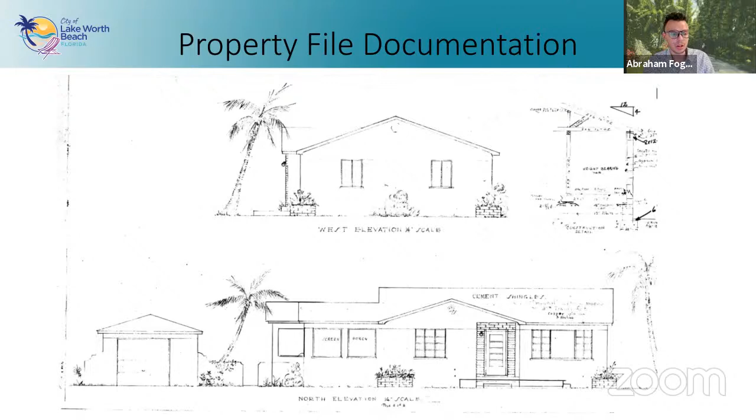So just a quick recap in these next couple of slides. The subject property is a 50 by 135 lot located on the southeast corner of North Palm Way and 8th Avenue North, a single family property in the single-family residential zone district. As we covered in July, this is a masonry minimal traditional structure that was designed in 1949, and on the bottom left corner, we can see the garage, which is what we will be discussing tonight.

Here's a current photo showing the garage and the alley behind. So again, tonight we will be reviewing the conversion of the existing garage into additional habitable living space to be a pool cabana, and a variance from base flood elevation requirements of the Florida Building Code due to substantial improvements.

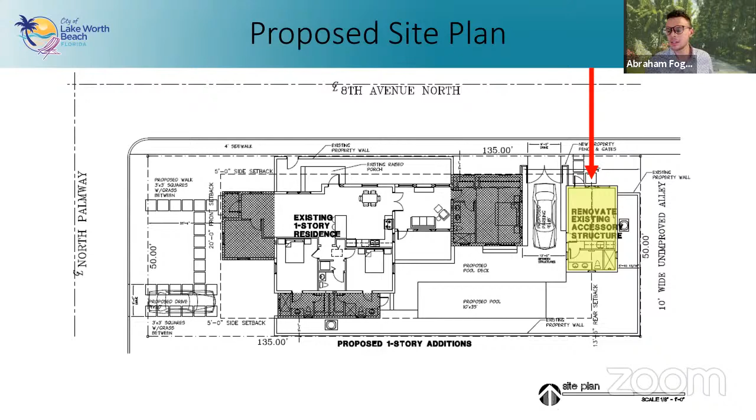So here we have the site plan that was approved in July. I've highlighted the location of the existing garage that will be converted to a pool cabana. There are no changes to the actual footprint. They are exterior alterations and a change in height.

So as I mentioned, we're not seeing any site changes here. The main thing is the BFE, which we covered last meeting, but just to touch on that again, per FEMA, a substantial improvement may occur when plan improvements exceed 50% of the appraised pre-improvement value of the structure based on Palm Beach County property appraiser records. That value is $124,106. So at that 50% threshold, that would cap the improvements at about $62,000.

And here on this slide, we have the project valuation provided by the architect, which would place the overall improvement at over $135,000. So that would constitute a substantial improvement. When that occurs, you would need to meet current base flood elevation requirements.

The pending flood zone is AE, which would require 9 feet NAVD. The current garage sits at 4 feet, and there's a proposed improvement to the garage slab that would raise that by 4 inches, so that would bring it to 4.33 NAVD, whereas the pending flood zone puts it at 9 NAVD.

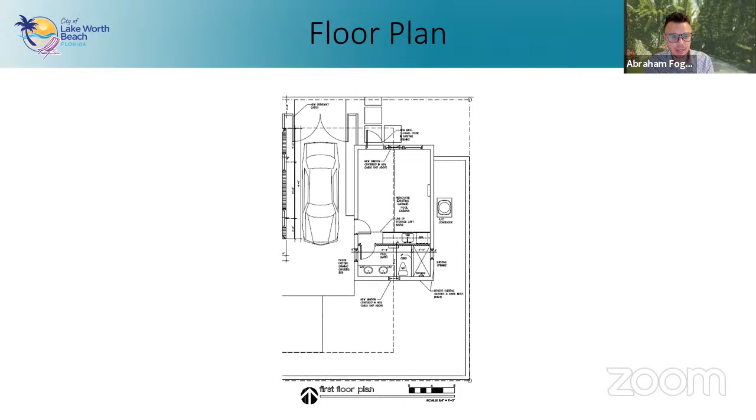The applicant has provided 2 options. Option A, and the project architect can further explain, is the preferred option where the hip roof would be changed to a gable roof, and overall it has been lowered to match the ridge height of the other gables on the structure. The other change was a window beneath that gable end that now is a decorative vent. Overall, the rest is largely the same since July.

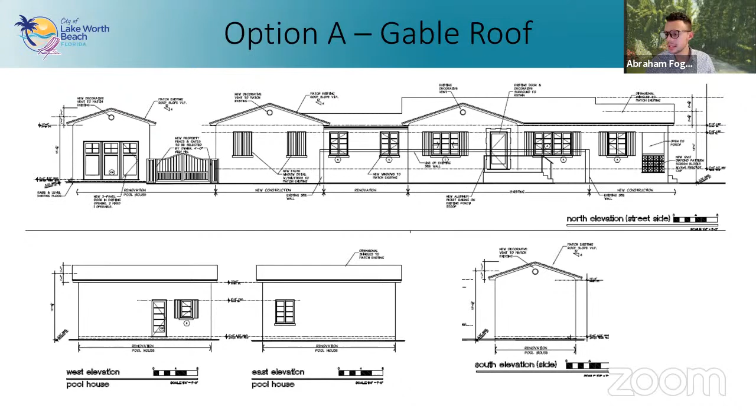So option B is largely the same, but we do have a hip roof design, and this is being presented since the original garage was designed with a hip roof, so this option would respect that original design.

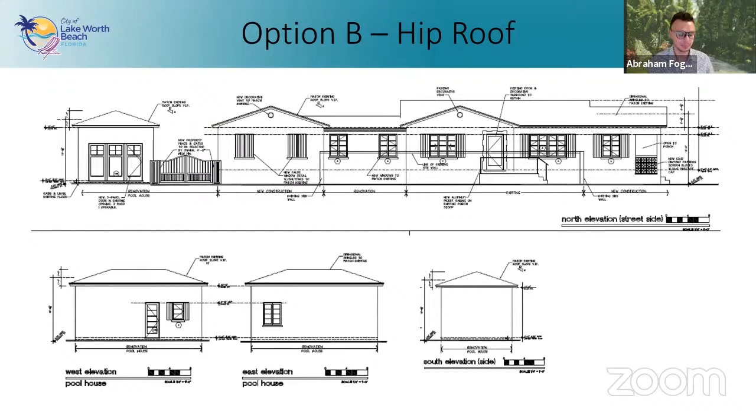So as we covered last month, the pending flood zone requires 9 feet. After those 4 inches are added to the existing slab, it would be 4.33. So you would be providing a relief of 4.67 feet.

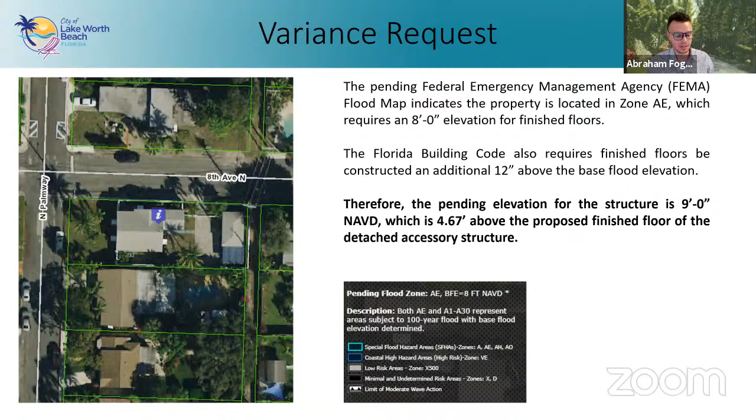Per our code, that relief is available for properties designated in a local historic district as contributing properties. This property is eligible for this type of request since it is a contributing resource to the Northeast Lucerne Local Historic District.

Moving on to our variance criteria, it's provided in LDR section 23.7-7G2. We did go over this criteria in July.

In our staff analysis, we contend that complying with the strict interpretation of the Florida Building Code could result in a disruption to the structure's historic appearance. Raising the finished floor elevation of the converted garage an additional 4.67 feet could disrupt the foundation and wall proportions and general height of the building when compared to similar structures.

Allowing the garage to remain below the required BFE is unlikely to increase flood heights, cause additional threats to public safety, public expense, or create a nuisance.

The proposal is compliant with impermeable surface requirements in the LDRs, referring to the site plan as a whole, and there are pervious buffers around the property lines which also help with drainage.

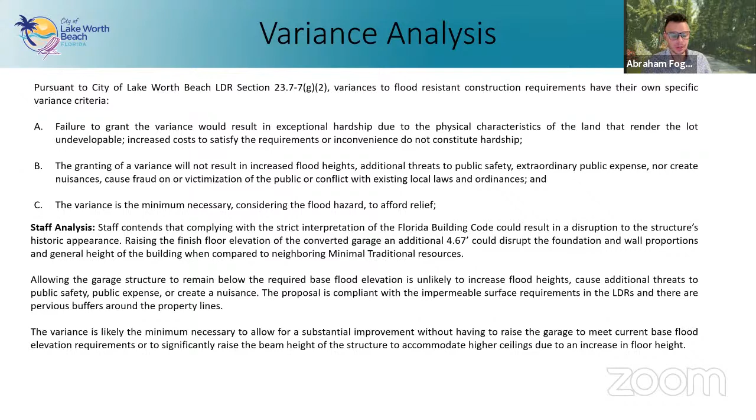That is the preferred design of the applicant, but an alternative design illustrating a hip roof configuration is also provided for the board's consideration. Both roof design options maintain the same overall height.

The proposed alterations, while significant, are not in conflict with the architectural style, massing, and design common among minimal traditional buildings from the 1940s and 50s.

The applicants have lowered the roof's midpoint height from 14 feet 3 inches to 12 feet 2 inches since the July meeting. As previously mentioned, the window beneath the gable end was replaced with a decorative vent.

Staff has not received any written comments associated with this application. In conclusion, the proposed exterior alterations requested in the COA application are generally compatible with the Historic Preservation Ordinance criteria and the Historic Preservation Design Guidelines.

The structure also meets the eligibility requirements for a variance from BFE requirements, and it is staff's analysis that proposed improvements would not preclude the continuation of the building's contributing designation. Therefore, staff recommends approval of the COA and variance applications with conditions.

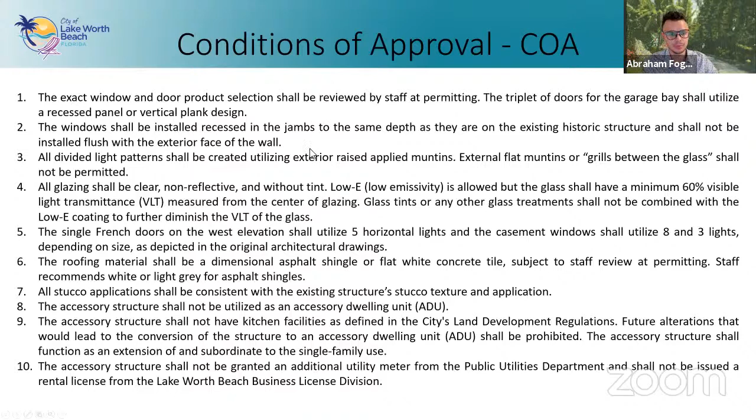I think let's ask the applicant if he has anything to add to Mr. Fogel's presentation.

You're muted, sir. Can the applicant hear us? Yes, he can, I can hear you. I'm sorry, I was muted.

Do you have anything to add to Mr. Fogel's presentation? I don't have anything to add other than to reiterate the request for the gable design. As we turn the corner from the front of the house down the side street, I think the repetition of the gables offers a better massing and really ties all of the additions and work we're doing on the property together.

Okay, thank you very much. There seems to be no public comment on it. So does the board have any questions?

Let's start with Mr. Pickett, any questions or comments? I just wanted to clarify, it does say in the conditions that there aren't supposed to be any kitchen facilities in there that would allow it to be an ADU, and it looks like that on the floor plan. I just want to make sure that's the case.

Overall, I think they did a good job coming back with some good alternatives. I do still prefer the hip roof, but I'm open to the gable roof.

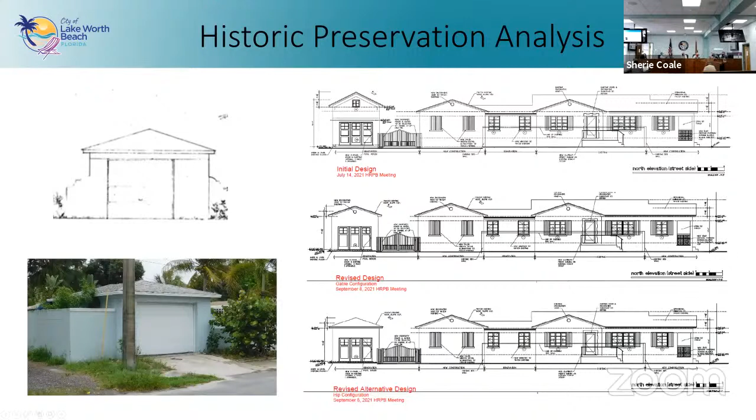Well, it seems like the applicant has done everything we've asked for. Could I entertain a motion, please? Yeah, I move to approve HRPB project number 21-00100119.

And 21-01500004, with staff recommended conditions, for certificate of appropriateness for exterior alterations and a variance from base flood elevation requirements of the Florida Building Code for the garage structure located at 732 North Palm Way, based upon the competent and substantial evidence in the staff report and pursuant to the City of Lake Worth Beach land development regulations and historic preservation requirements.

Motion by Mr. Harris, second by Mr. Dorinzo. Any more discussion? Hearing none, all in favor, aye. Opposed, nay. Motion carries unanimously. Thank you, sir. Thank you very much.

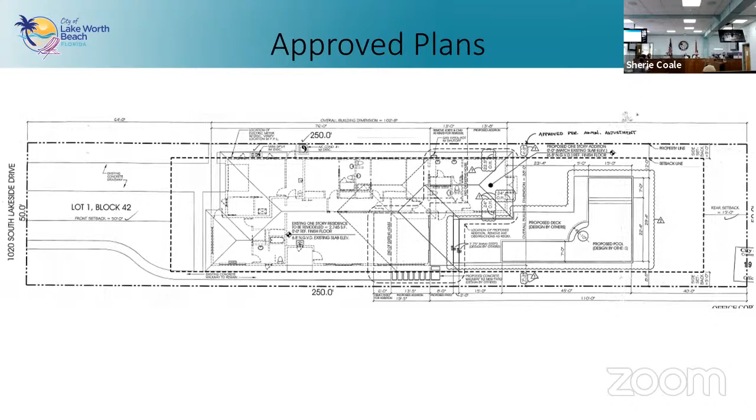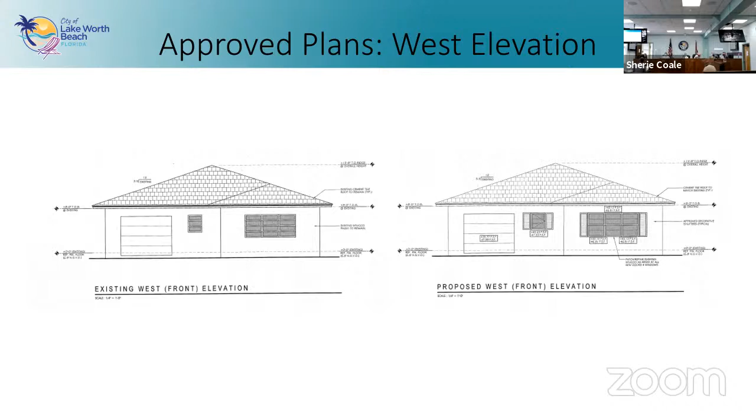According to the Lake Worth Beach Building Division records, the rehabilitation of the property was completed under building permit 192165 with a declared valuation of $251,955. The applicant submitted the completed work application for the work certification under the tax exemption and documentation for the completed work, and we'll go through some of those photos now.

This is the west elevation. As you can see, the new flush panel door, the very bright white concrete tile roof, and the new windows.

Here you can see a close-up of the front bay of single hung windows. These were approved with a divided light pattern to kind of replicate the awnings that were removed, the 4-light pattern.

This is the south elevation fronting South Palm Park. Again, you can see a little bit of the white tile roof, the new windows, the new entry door, and exterior lighting fixtures.

This is a wider shot of that elevation, and you can see a little bit of the addition to the right side of the photo. It's got that large glazed area and then a covered patio area.

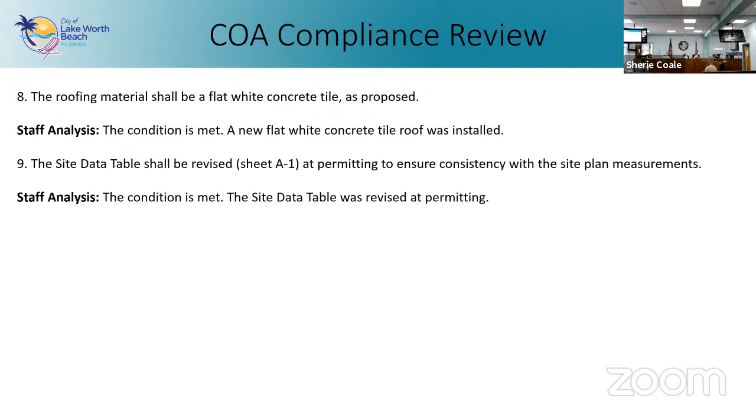These are the tax exemption conditions of approval. The project was found to be in conflict with condition number 1, which requires compliance with all conditions of approval, and as we just went through, conditions 1 through 3 were not met. Condition number 2 also requires compliance with the Secretary of Interior standards, so we'll defer to the board to determine if the intent of the SOI standards were met in this application. But the application is in compliance with number 3, which was their documentation requirement.

The project was approved and conditioned prior to the adoption of our current glazing standard, which requires a visible light transmittance of 60% or greater. The standard effectively prohibits low E treatments, which turn glazing shades of gray or green.

The current glazing standard was researched and instituted due to inconsistent industry standards between manufacturers as to what constitutes a clear low E glazing. But per the applicant's Part 3 application, included as attachment D, low E windows were selected to protect the interior materials of the home from harsh exterior southern, eastern, and western exposures. Bronze window frames and tinted glass were selected to provide the best match for the existing windows, which were tinted bronze glass with bronze frames.

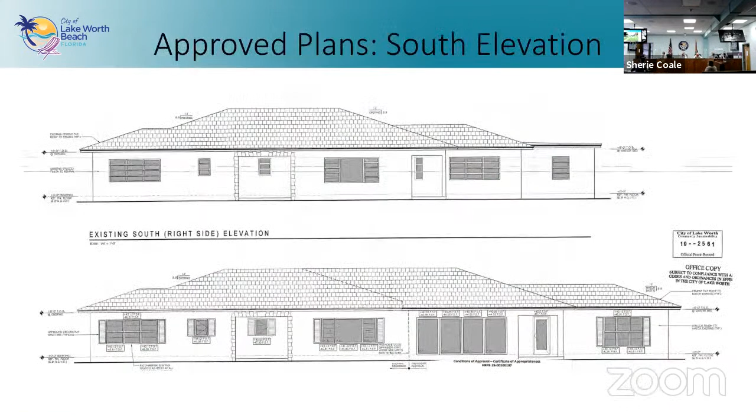I'm going to go next before a couple of others and say that I do have a problem with it. Ames Bennett in 1956 had no ability to put in tinted glass. Also, if you look at the before front elevation, the window next to the garage apparently does not have tint on it, which makes me think the tinting on all the rest of the glass was applied, probably with a film at some time in the past. But the original building, to which we are duty bound to look, does not have tinted glass.

And by approving this, we are giving this owner—and he did a wonderful job, I noticed it gets the House of the Month award, a beautiful job—but we are going to be giving him a 10-year free ride on what is it, $250,000 or so of improvements. That's a lot of money for the city, and for that kind of money, I think we should be a little more rigid in our standards.

I may be outvoted here, but I think maybe there's another way. You had mentioned there is a possibility of approving it except for that. And if so, what does that do to his tax deferral?

It would require a little bit of collaboration between us as staff and the county tax collector. When we hand off the application, it would essentially be removing the cost of the windows, or the cost of the improvement for the windows, from the scope of the tax exemption. They would still get the tax exemption for the addition, the roof, the interior improvements—basically everything aside from the increase in cost as a result of the windows.

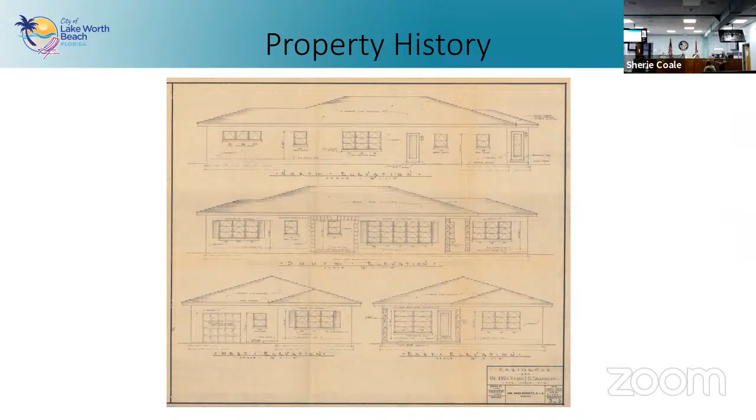I'll move to approve it. But 100%, we're not talking a proportional, we're talking now 100%, right? It's whatever would make up the motion.

It's been represented that the windows all were the same, and they've simply replaced. Okay. All right, we're going to read. Okay, so what do I read? Yeah, it's always - okay, I see it. I move to approve

HRPB project 19-001-00107 for a completed work application for a historic preservation ad valorem tax exemption for the property located at 1020 South Lakeside Drive, based upon the competent substantial evidence in the staff report and pursuant to the City of Lake Worth Beach land development regulations and historic preservation requirements. Further, I move to recommend to the Lake Worth Beach City Commission this application and its approval.

And just for clarification, Mr. Martin, I'm assuming you're making this motion because you're recommending that the replacement windows are consistent with the Secretary of Interior standards because they replicate for windows - is that correct? Yes, that's correct.

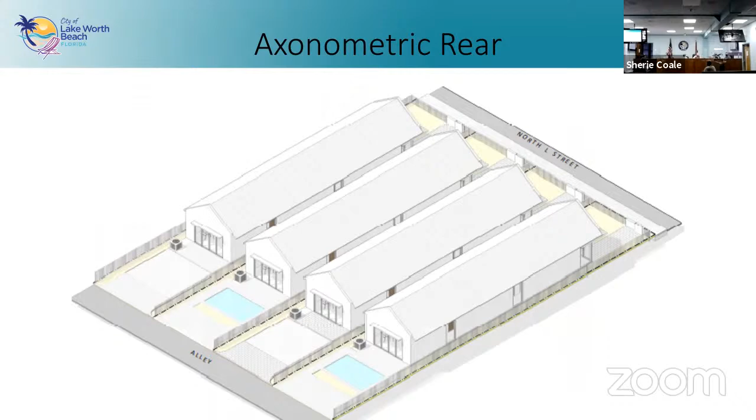Here's a rear view showing the fenestration on the south and rear sides, along with the rear site plan configurations. You can also see that the mechanical equipment is located to the rear of the properties, which is where code specifies that it should be.

A landscape plan was also provided in the application, which will go through final review at permitting. A cursory review by the city's horticulturalist indicated that the proposed plans were meeting the minimum requirements. A tree survey and disposition plan will be required at permitting. All trees that will be removed must be replaced on site or mitigated per code requirements.

Here you can see the interior plans. Again, these are going to be identical for all 4 buildings. It's kind of a shotgun layout with an office bedroom at the front, a flex bathroom, laundry off the hall, and then a master, and then a common great room, dining room, and kitchen. The living area to the rear does have large sliding glass doors to access the rear yard.

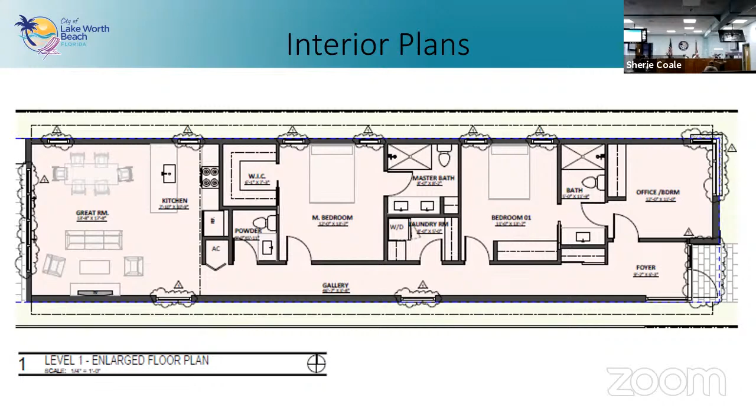The project architect has established a regularized fenestration pattern around the building. You can see those openings clouded. Included here are some corner glazing on both corner windows on both corners of the front facade, which is a signature element of Art Deco and Streamline Moderne architecture, and we'll hit on that in just a moment.

These are the proposed west and east elevations. The buildings are pretty low, with the top of the gable at approximately 17 feet. The rear west facade features a 4-part slider, which does take up most of the facade. And then the front east elevation features those corner casement windows and fixed windows, an eyebrow over the recessed entryway, some stacked horizontal wood banding. You'll notice though that the fascia of the gable roofline is hidden behind the wall, but it does stick out on the sides where the overhangs are.

These are the proposed side elevations. Again, the design utilizes vertically oriented casement and fixed glass windows at regular intervals and generally avoids long expanses of blank facade. The south elevation uses some substantial floor-to-ceiling windows to allow light into the hallway, but it does use some blind recesses to create a regular pattern. You can see that indicated as the stucco reveals the faux windows.

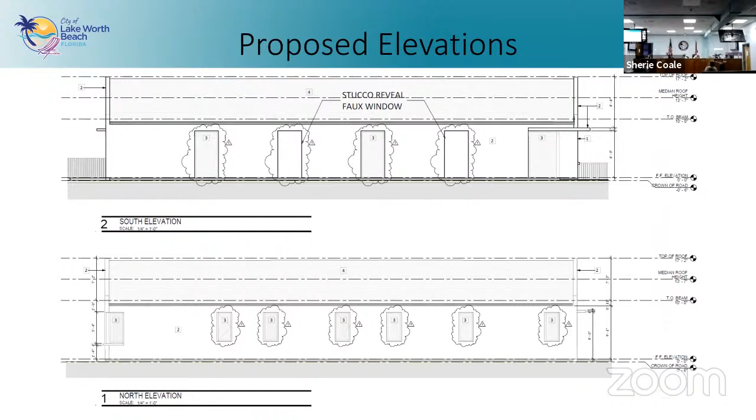This is the streetscape elevation at the top, which is a great tool to use to determine your overall height, massing, and spatial compatibility. The structures are generally consistent with other single-story buildings with gable roof lines on the street, height-wise. Below is a rendering provided by the architect. You can see the wood slat detailing around the doors and the configuration of the roof lines. Also pictured here are the fencing, gates, and landscaping. You can see that the horizontal wood slat detailing is carried over onto a sidewall next to the entry gate for each property. Also evident is all the finishes. So it's a smooth stucco exterior, white window frames, full view glazing, and again, that wood detailing and asphalt shingle roofs.

So the historic preservation analysis is provided in your staff reports on pages 6 to 11. Staff has 2 primary areas of concern highlighted in the analysis, which is the execution of the massing in regards to the architectural type of the building and the general repetition of 4 identical buildings.

The project is designed in a contemporary Streamline Moderne style, and this style has its own chapter in the design guidelines. But per the design guidelines, the style was generally 1 or 2 stories, utilized smooth stucco walls with rounded corners, horizontal detailing. Windows were generally porthole, casement, and fixed pane, but some windows wrapped the corners of the building. The buildings generally sit on raised masonry or slab foundations and utilized flat roofs almost exclusively.

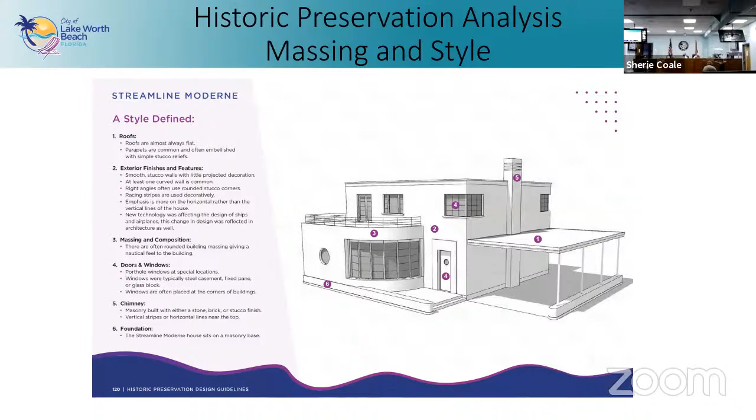So the current proposal features many of the design traits associated with Streamline Moderne architecture, including the corner fixed casement windows, the horizontal eyebrow, and the channel detailing around the entryway. Staff's primary concerns come from the gable roof line, which is atypical for the style, as flat roofs are most compatible. The building's prominent gable roof line is most commonly associated with the city's collection of 1920s frame vernacular cottages, which feature wood clapboard siding, vertically oriented windows, and slender rectilinear plans. The design guidelines discourage the mixing of architectural styles or architectural elements from different styles, and it states that the best approach is to choose one style of architecture and to design a structure that utilizes the common characteristics, proportions, and materials of that style.

So to keep the architectural style consistent and true to form, staff is recommending that the proposal utilize a flat roof with a short parapet. You can see the staff edited image to the right on your screens, illustrating what that could look like. This is shown with a slightly tapered parapet, similar to the building on North J Street that we just saw.

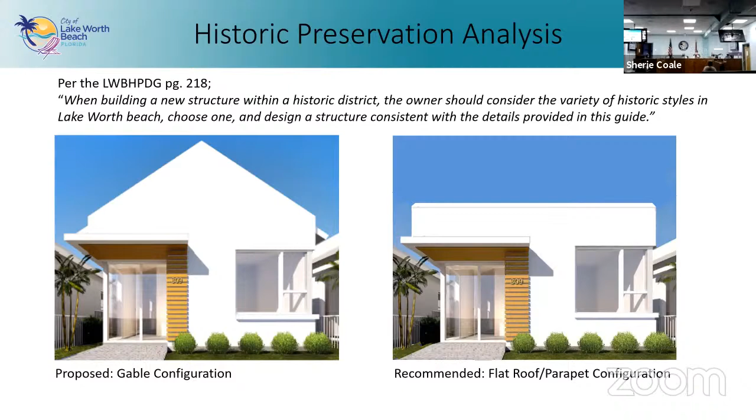Next slide. In addition, the city has site design qualitative standards, provided in section 23.2-31 of the LDRs. The intent of the standards is to minimize negative impacts of development on neighbors by establishing qualitative design requirements. Section D5 states that look-alike buildings shall not be allowed unless, in the opinion of the board, there is sufficient separation to preserve the aesthetic character of the present or evolving neighborhood.

This is not to be construed to prohibit the duplication of floor plans and exterior treatment in a planned development, etc. But this requirement involves the construction of 4 identical single-family residences that are not part of a planned development application. Staff has concerns that the repetition of 4 identical buildings will detract from the varied and diverse development patterns of the streetscape and surrounding historic district. While structures from similar architectural styles share similar design elements, it is rare that independent neighboring structures be identical. Development in Lake Worth's historic districts is eclectic and diverse, creating a wide-ranging architectural environment. Staff contends that the construction of 4 identical structures is not in keeping with the surrounding built environment.

Next slide. As such, staff is recommending denial of the application, as the roof design is inconsistent with the design guidelines criteria on Streamline Moderne architecture and new construction. Additionally, as just covered in the site design qualitative standards, the repetition of 4 identical buildings is inconsistent with the development patterns of the neighborhood. The item may be continued at the board's discretion to facilitate a redesign of 4 unique residences that are consistent with the development patterns of the surrounding district.

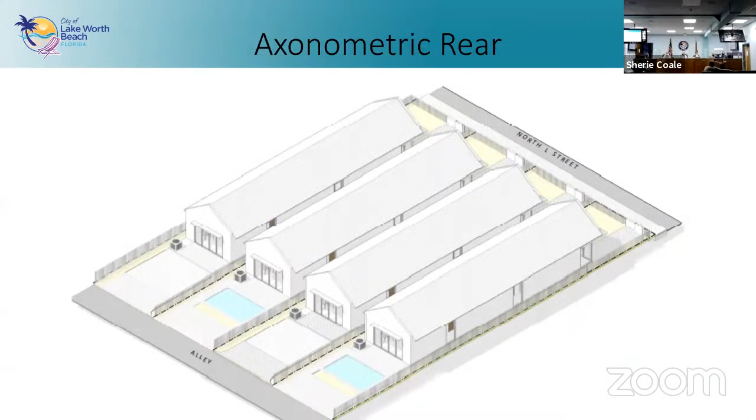I believe Mr. Antoniazzi is here with us this evening. Let's turn it over to the architect and the applicant. Do you have Giorgio Antoniazzi here? I believe the owners are here with us as well, and they would like to say a few words. I don't know if their mic is on or not. Yes, I think it is. Okay, I'm going to say just a few really quick words before I hand it off to Giorgio.

My name is Lori Principe. This is my partner, Jeff Mercier. We're the developers and owners of 307 N L, the project we're talking about today. We're very excited about this project. We love Lake Worth Beach. For those of you that don't know us, we are the developers of the One Luxury Condominiums, a beautiful 14 residence building on the corner of Lake and South Palmway with really nice commercial on the bottom. We're also currently developing and building Alora, right across the street from the One. So we're very invested in multifamily in the area, and we love this city. We're really excited to tap into a new niche market of single family homes. Thank you for your time, and we hope you'll consider our proposal tonight.

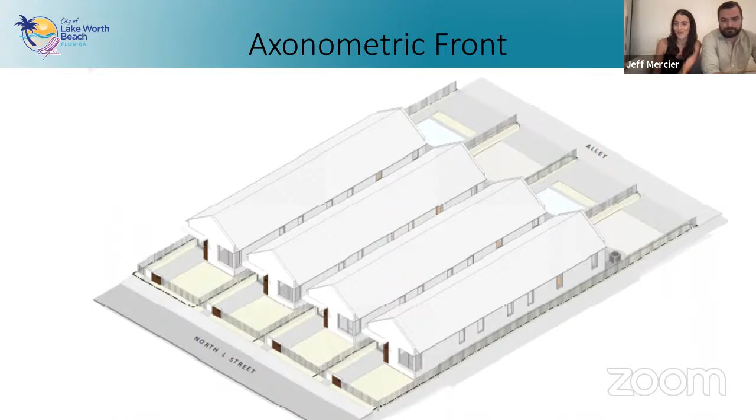Giorgio. Okay, I'm Giorgio Antoniazzi, architect for Sundream Development, the subject proposal we're reviewing right now. I'd like to talk about the story of this lot. As you know, it's been vacant since the 90s. We've looked at many different projects for this property. We've considered 6 townhouses side by side, a multifamily project, and perhaps just 2 homes on here.

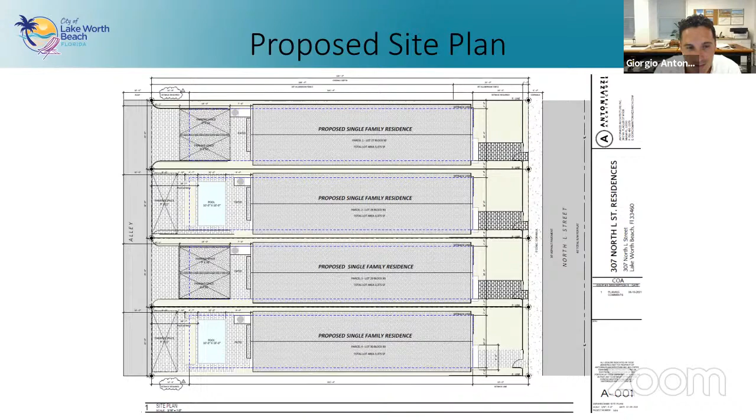But we're always trying to find what is the best thing for Lake Worth, what is unique about Lake Worth, and showcase that. To us, especially on this street, if you go back to the zoning plan, you can see that the parcels, especially along L Street, are divided into 25-foot parcels, something that's going away in this city.

They're unique parcels, unique properties. Now with the small home movement happening throughout the country and property prices going up, suddenly we see an opportunity to develop on 25-foot lots. I found this a very exciting challenge and something that would only improve the streetscape of North L Street.

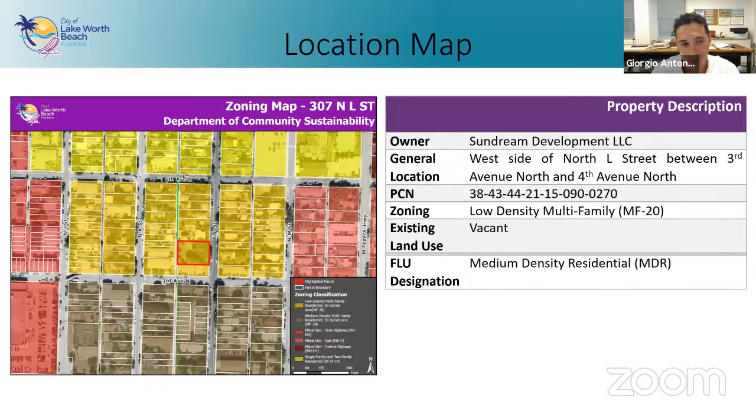Seeing what Sundream Development has developed thus far in the city, sort of modern, always sticking to modern architecture, we developed a modern design. However, because of the shape, a 25-foot wide house, we felt the flat parapet was too reminiscent of a utilitarian structure, and wanted to bring a little bit more decoration, a little bit more flamboyancy to this design. So we came up with a gable, with no intent of ever imitating a vernacular architecture.

When I see this, I see a modern house. I do not see a wood vernacular house. In no way are we intending to imitate or mix styles when it comes to this design.

Yes, perhaps we can do things to improve it, and I think most of the conditions here we're ready to agree upon. I think even perhaps those eaves becoming a little bit shorter to increase the streamlinedness of the building, instead of having them extend past the building like they're shown here, would increase the modern style.

Modern architecture is a utilitarian sort of architecture, and this is just the best way to build a roof at this location. Actually having that parapet extend and hide the gable is exactly what would not be done in a wood cottage house.

In terms of the repetition, I drive around and see buildings that are very similar, as Jordan described, however with certain differences. There are 2 ranch-style homes at the end of this same street that I could almost bet were exactly the same when they were built. However, over 50 years, and over 100 years for some of these wood houses, they've been modified, just like these would, just like perhaps an owner a month from buying one of these may change them.

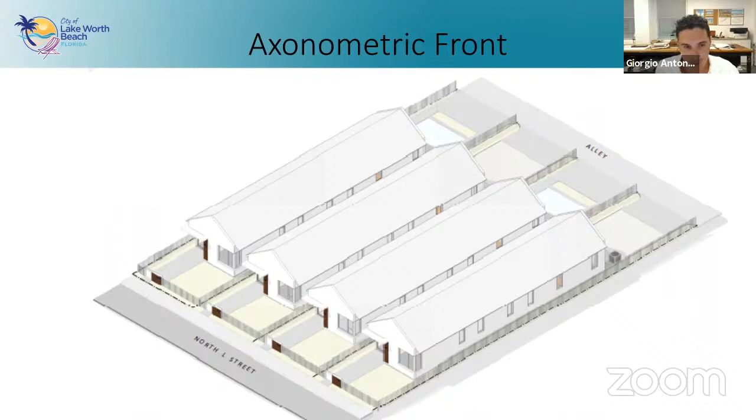Okay, well, thank you for your presentation. Are there any public comments?

Yes, we do have, I believe, 6 or 7 public comments, and they should be read into the record. I can do that for you if you give me one moment. I've included, I think, each of you have a set of copies of them. Yes.

Have copies, plus they were emailed to us this afternoon. Yes, yes. So the first one comes from Diane Scoglin.

Please be advised this is a formal request to have my comments read into the record. I'm Diana Scoglin, along with Michael Starr, and we own and live at the property 318 North L Street. We have serious concerns regarding the construction of 4 single-family home units on the property at 307 North L.

For the following reasons: first, there are many large trees located on the property, of which 3 are mango trees. If they are removed for the construction, a large swath of canopy is being removed from our city. What is the plan to replace that loss?

There are other properties located within a 1-block radius that are also being considered for development, and they as well contain large mature mango trees. How do you address the concern of the depopulation of the neighborhood of mango trees, which is in fact the namesake of the neighborhood called Mango Groves?

In addition, the city has had a festival in honor of these trees and fruit called Mango Fest, and the NAPC is researching hosting that event in 2022.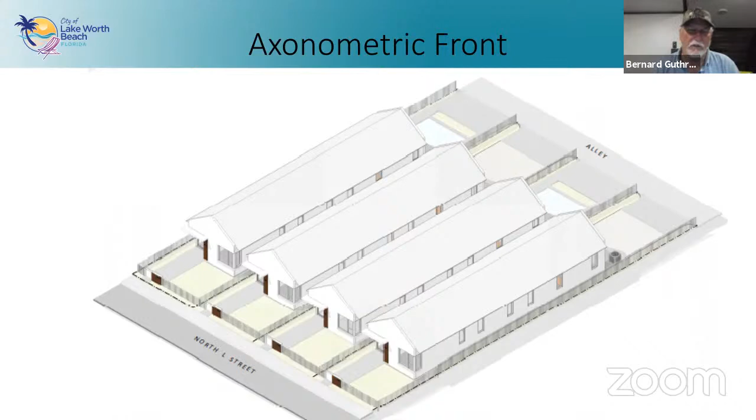In the past, this board has reviewed projects like this when you're looking at a long, narrow building with no cutouts. There's no staggering of the buildings. There's no anything—it really does.

In looking at this particular project, you can understand why the city has an actual prohibition against doing something like this, because it's just the look of them.

It becomes something similar to what you'd find in an apartment rental complex, where every single house is the same colors, same everything.

I don't necessarily care for the front gable ends, because there's no detail, no vent or even a false vent look to it. And considering that these developers have done some very well—the one is what I'd be hanging my hat on—and the fact that it looks different, it is modern in style, and it looks very good.

And the project that they're taking on across the street is going to fit in well. I'm not against going with a modern style in the historic neighborhood, because we've been told many times that we can do that. We actually approved a project at the corner of 6th Avenue and J Street that is extremely modern. I would recommend the developer research something similar if you want something that will stand out in the neighborhood and make a statement. I think we could do something much better than what this is. I think the parking is going to be a problem.

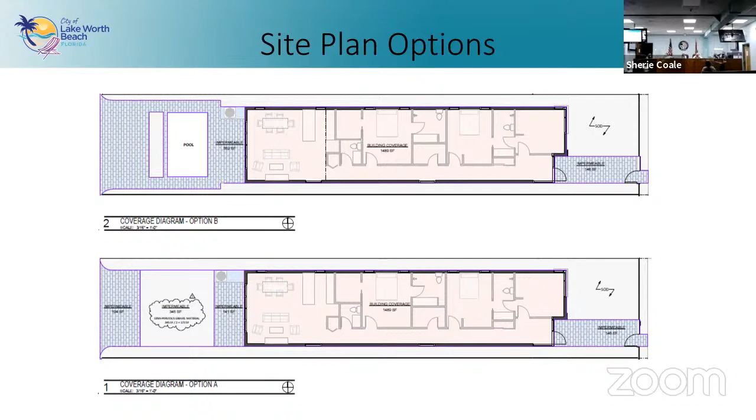Judy Fox: I agree with Chip. They kind of remind me of Stalag 17—they're just sterile. They don't fit in with my idea of Lake Worth. They don't fit in with the Secretary of Interior's idea of design. I just see a lot of problems. Chip mentioned parking; I'm not even thinking of that. To me it just reminds me of that old song, made out of ticky tacky, and they all look just the same. That's my problem.

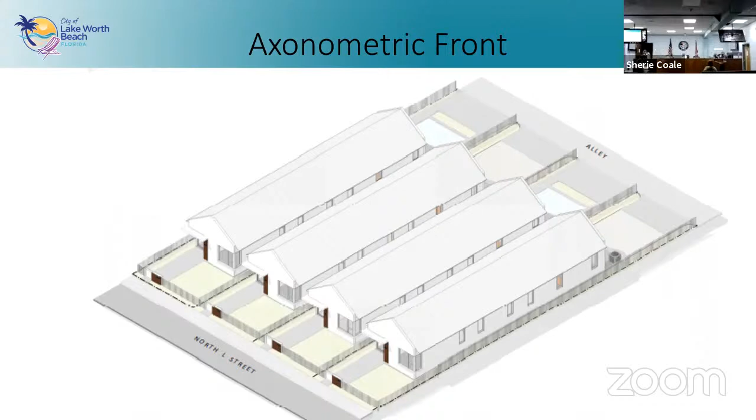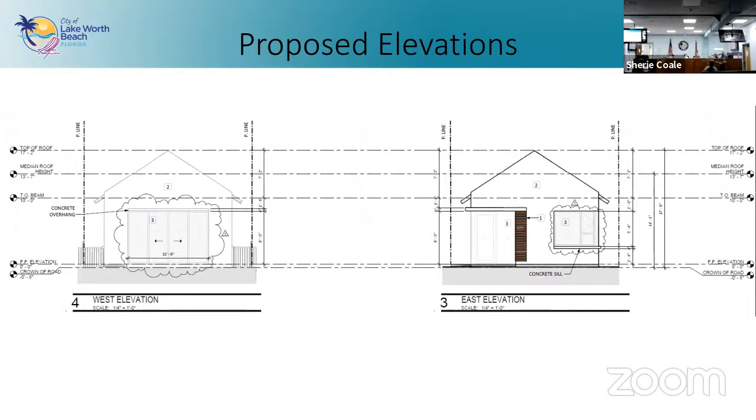Mr. Dorinzo: Mr. Hodges, can you bring up the front facade photo? Mr. Vogel's controlling that—oh perfect, thank you. No, the one in color that shows them, the rendering. Yeah, I think that looks kind of cool.

And I'm all for building on these 25-foot lots, bringing that 100 back to the 25, because that's how the center of our city was. It's an eclectic historic district where we've allowed a lot of little projects, especially on K, that neighborhood right there, K and L. The young guy who knocked the house down and put up that really cool one, he's in their block. You have townhouses up two blocks. It is an eclectic block in many ways.

Dealing with the little houses all the time, every day—trash cans, especially our big trash cans, the big green one and the big black one, the bicycles and all of that—that to me is going to be an issue in between the houses, dragging them out to the street. I could maybe see staggering it, or here's an opportunity—you guys did an awesome job, we love your project, one of the best ones built in the city in many years. I just think there's a way to take this up one more notch, in my opinion.

Mr. Chairman, thank you, Mr. Martin: Well, I tend to agree with most of the items mentioned. I just wanted to ask staff a question. When you have the 25-foot lots, I've been driving around and I don't see those elongated, huge structures unless they were built more recently, scattered maybe in other neighborhoods, but I haven't seen them around this neighborhood. How big is typically the square footage of a home on a 25-foot lot?

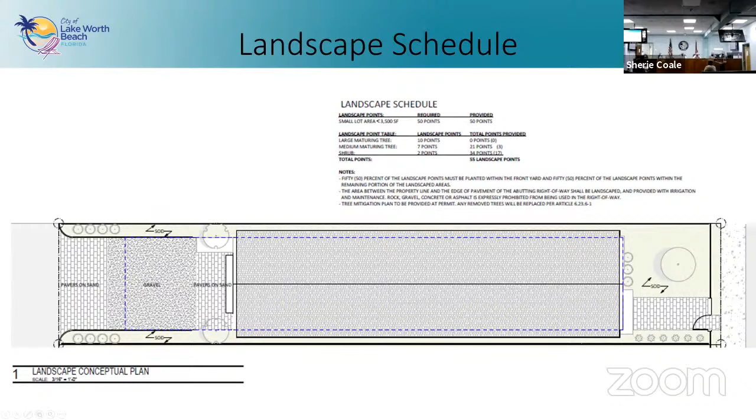So really the context here is, if you're concerned about the trees for historic context, we can add a condition of approval to save as many trees as feasible, but I think really the scope of the COA is really the architecture and the appropriate context of the structure.

Okay, thank you. I have to put in my comments and wait. He has a little more. Oh, I'm sorry.

Otherwise, I echo the concerns as far as being able to get front to back, because it is very tight. However, it meets the zoning regulations as far as setbacks and pervious area. And there is a market for this type of house—there's people that are downsizing, older couples, older people in general, or people that just don't want a two-story house. So I think there is going to be a market for this type of house.

I do like the idea that they've gone back to splitting up the lot and making the 25-foot lots. I think there's a market for that, and it's very appropriate in this area. The only concern I have is the repetition of it, having the same thing repeated 4 times in this one particular area. Because it is such a bold design, it's just a little much to have that one thing 4 times. So I think there's an opportunity to break up the design, to have some modifications here and there.

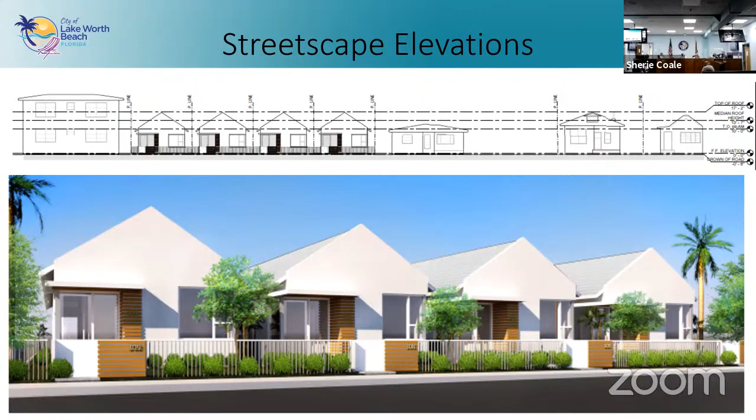Thank you. It appears to me that we are heading towards a continuance, and we hope that the architect and the applicants are taking notes. I would have to say that if I were the architect, I would have started with a planting plan showing the current tree locations and seeing how many I could save and how I could work that into the site plan. I agree with Mr. Harris that the entire site plan is suspect.

I know you have different options—you could have done townhouses, you could have done apartments or whatever. You've chosen this. Your gable ends are high enough that you are getting close to being able to do a 2-story house, and I understand that's not what you want, but these take up the entire site. They leave no space for any of the amenities that we talk about. I really would hope that you would start from zero and try something different. It truly is a barracks.

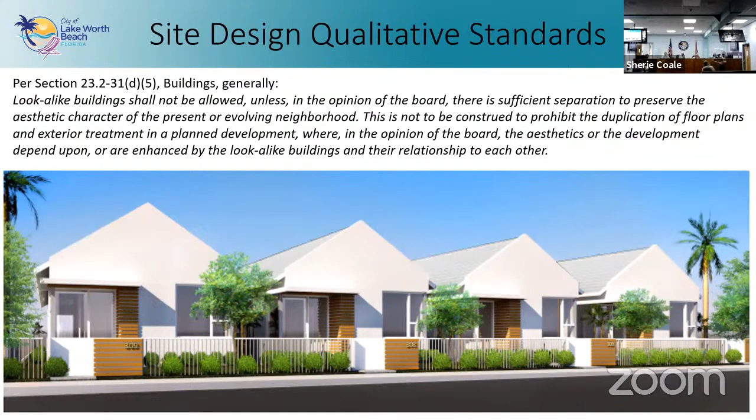If there is no other comments from board members, could I assume there will be a request for continuance? Would someone like to make a motion? I would like to make one comment before we go on.

Sure. I just want to thank the developer for the buildings that they're currently constructing on Lake. They're actually very beautiful buildings. We don't want to just get discouraged—just reapproach us again. You're going into the interior of the neighborhoods, and the historical issue is even more important when you leave this central downtown Lake Avenue and Lucerne. So we certainly appreciate your coming to Lake Worth Beach.

Well said. Thank you. Mr. Chairman, as part of your discussion point, would you like to give an advisement on perhaps having a small exterior storage access even on a portion of the house? Because people may need a lawnmower or some type of exterior storage.

Sometimes I've seen them built in, they can be quite small. I think they've heard that as one of the board's comments. You mentioned that we're adding a shed. There's things that they're speaking about that we've already spoken about, correct? That we're going to cover, give an option to the buyer.

Yeah, it's really in the jurisdiction of this board to talk about a shed. I mean, we want to do something that's appropriate for the neighborhood.

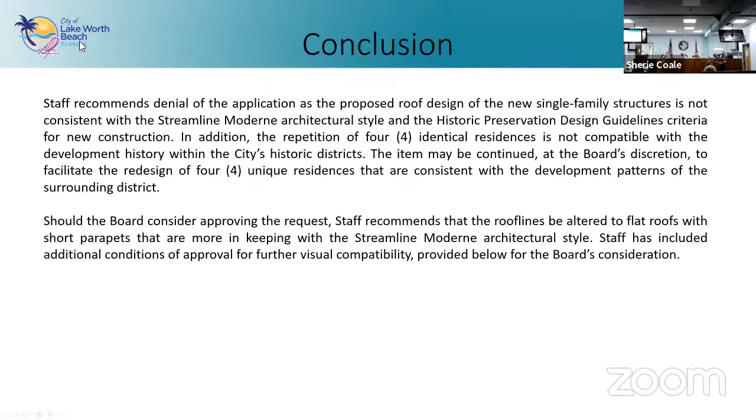Do I hear a second? Second. Second by Mr. Pickett. Okay. All in favor, aye. Aye. Opposed, nay. Motion carries unanimously.

Okay, we'll see you next month, or possibly if you want an extension to the November meeting. That'd be fine. Let's move on to, where are we? 320 North Lakeside.

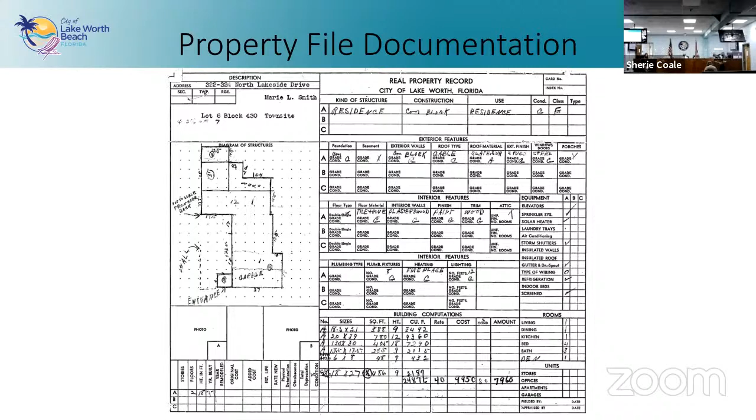So we'll go through some photos, but the building does maintain a moderate to high degree of the 7 aspects of historic integrity. You can see the staggered and layered design of the building, different roof lines. There's a 2-story portion in the back and very low in the front. Next slide.

There's another image. As you can see, there's currently a little motor court to the north of the property. You can see the vehicular gates there. The front portion of the property, you can see the front door and the 2 windows right there. That was the garage that was in place by 1943. Next slide.

Again, that's on the north side of the property. Next slide. That's a view from the southeast corner, showing the pool and then that 2-story massing element. Next slide. So this is the south elevation of the building in that southern undeveloped portion of the lot. This is where the proposed addition would connect. Next slide.

And that shows that undeveloped southern portion of the lot. Next slide.

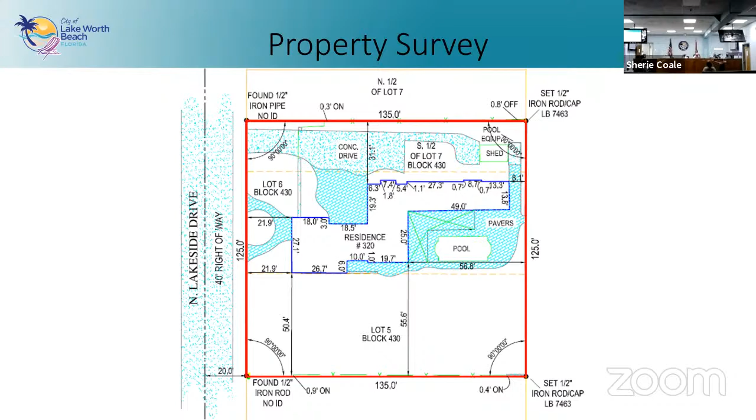So we talk about base flood elevation a lot. Typically that is triggered when a substantial improvement is triggered. But the city's building official and floodplain administrator, Peter Ringel, utilized an independent appraisal provided by the applicants to determine the substantial improvement threshold.

The independent appraisal assessed the depreciated value of the existing structure at $527,542. The applicants estimate that their cost of construction for this project will be below the $263,000 substantial improvement threshold.

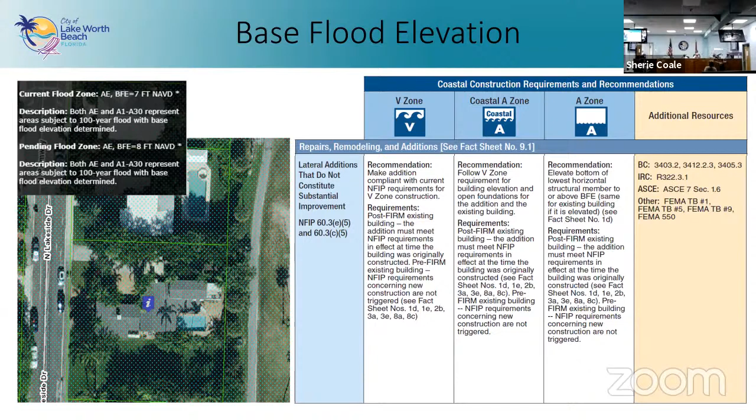Therefore, the addition is allowed to be constructed at the current BFE of the existing structure or higher, depending on their needs, but it is not required to bring up to current code.

Next slide. So this is the proposed site plan. You can see all of the existing in a simple outline with the existing driveway and pool and paver deck to the rear. The proposed 2-story addition and driveway on the unimproved south side of the parcel are the hatched portion.

The addition, as proposed, is consistent with all site data requirements in the city zoning code. The plan does exceed the minimum off-street parking requirements, but complies with all impermeable surface, building coverage allotment, floor area ratio, and required building setbacks.

The connecting element, you'll see that kind of slender portion that connects the garage portion to the existing structure, is set back roughly 47 feet from the front property line, with the front facade of the 2-story garage portion set back roughly 32 feet.

Both massing elements are set back from the front facade of the existing structure, which is around 22 feet. Next slide.

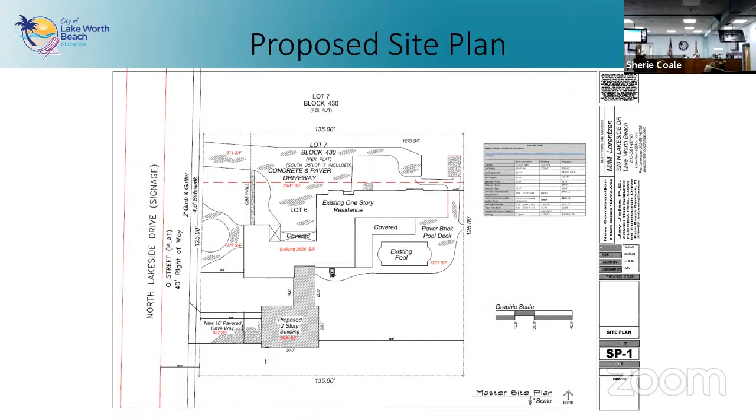So these are the interior plans. The first floor connector, that slender portion again, contains a staircase leading to the second floor habitable area, and the garage area contains a 2-car garage and a rear storage facility.

The second floor features a large master bedroom, master bath, his and hers closets to the front of the building. The second floor also allows access onto a 2nd-story balcony, which is fronting the rear yard. Next slide.

So the facade drawings of the addition, again, they were altered between conceptual review and the final drawings. The conceptual review drawings feature a 1-story massing connecting the garage addition, and also utilized a flat roof with a parapet over the 2-story garage portion.

The new design features a broad asymmetrical gable roof that utilizes a 1-story and a 2-story massing element that connects the primary bulk of the addition to the existing structure.

The front facade of the addition utilizes 2 vertically oriented single-hung windows in the connecting element and 2 false recesses on the 2nd floor. Vertical slat shutters with shutter hardware are placed in those recesses to create the appearance of window openings.

The remaining north, south, and east facades utilize vertically oriented single-hung casement windows at regular intervals and generally avoid long expanses of blank facade. Next slide.

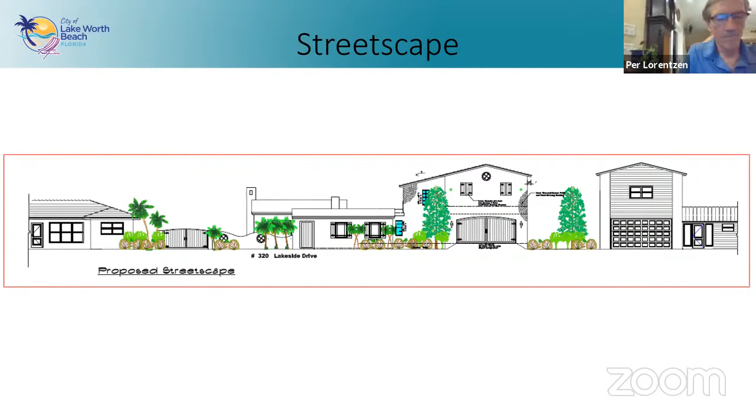Okay, may I say one other thing? Just looking at this, I'm trying to figure out a way to mitigate this massive elevation. But why not turn the gable on this thing 90 degrees? Why not have the gable coming down toward the street and rising to a ridge behind it, so you don't get the massive size of the ridge right in your face as you're looking at it. It just seems like there are lots of ways you could deal with this.

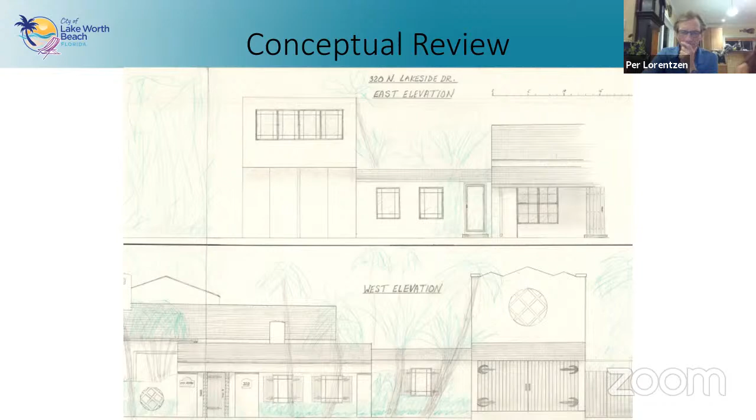I agree with you on turning the gable to the opposite direction. The original sketches that the owners did had a pent roof over the garage. The garage was forward, and that did a nice job of mitigating the height. I'm wondering if there's a way we could improve it, as for the roof to be turned 90 degrees and the connector to be lowered and also turned to match the roof.

Does the owner have thoughts on that? Can I respond? This is my wife, Rachel. We just can't imagine how many times we went back and forth on how we could fit the stairs and make it so you didn't hit your head and weren't in the garage with the stairs. We want the front of the house, which is only one story, to read very clearly as the front of the house.

I think it's really important that the garage be set back, it's just a personal opinion. I think it's unfortunate when garages have any sort of prominence on the front. Since we have 2.5 lots, we were trying to keep the garage a little further back, but we also have to deal with where exactly we join with the house. There's only a very specific place that we can join with the house. The sketch maybe doesn't do it justice, but in front of that joiner, the reason for how wide the connector is, there's a whole stand of trees which might mitigate that height.

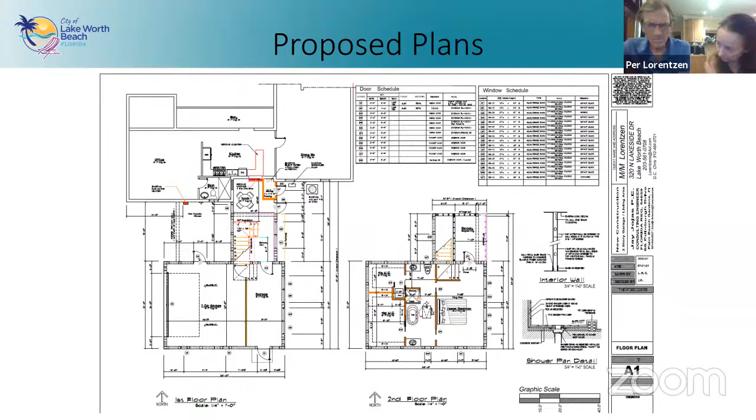I take that back. What I'm getting at is that if the gable were turned so that the slope were running essentially from west to east, since the gable is in the middle of that proposed north elevation, it would reduce the mass of the house tremendously, and it would not impair that stairway at all, the way this connector is drawn right now. It would just mean the roof doesn't run all the way down the way it does currently.

I would go a little further and say it does not need to be an equal gable end. You could drop it down to 7 feet in the closet area and have the gable off-centered, and get a 9-foot ceiling in the bedroom if you wanted. I notice you've got it down to 8 feet in the garage and 8 foot in the master bedroom. You could actually gain a little height in the master bedroom and have the west side come down to a 7-foot height, reducing the apparent bulk of that addition.

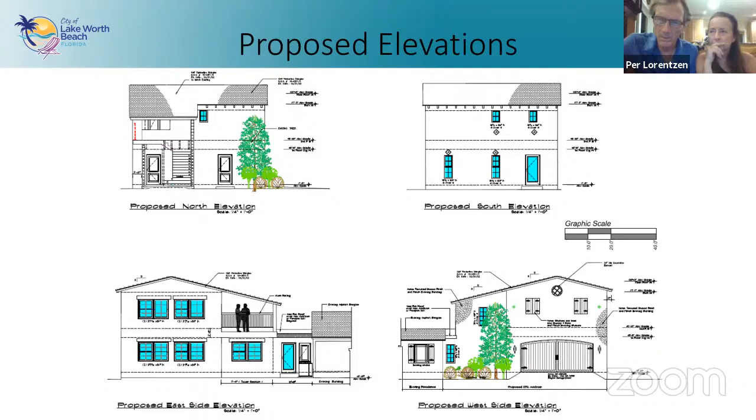I'm sure we can try that and lower it some, like they were saying, just to where the headroom is walking up to the second level. We can lower that some too, to reduce the mass. Another way we can lower it, someone was telling us, is we don't have to go with 24-inch floor joists. We can maybe go to 16-inch or even lower floor joists by using other types of floor systems, to lower it even more. So there are other ways we can lower the whole building height too.

You know, there are other ways too we can do it. That sounds good, if you can reduce the floor structure a bit and play with changing the height.

How much time do you think you need to make those changes? Not very much, I can do it in a day or so. Can we get you back here next month? Oh, sure.

Oh, that's right, in 2 weeks or? If you would like him to come back with a conceptual drawing and you want to see it, we're not going to have time to review the staff report. The packet is out. But if you want to come back and maybe under a board discussion item, look at where they've got to this before they do their final plans and give them guidance, we can continue the item until next week for guidance on that particular revision. But other than that, they need to come back the next month for staff comments on any revisions, like a revised staff report. Okay, does that make sense?

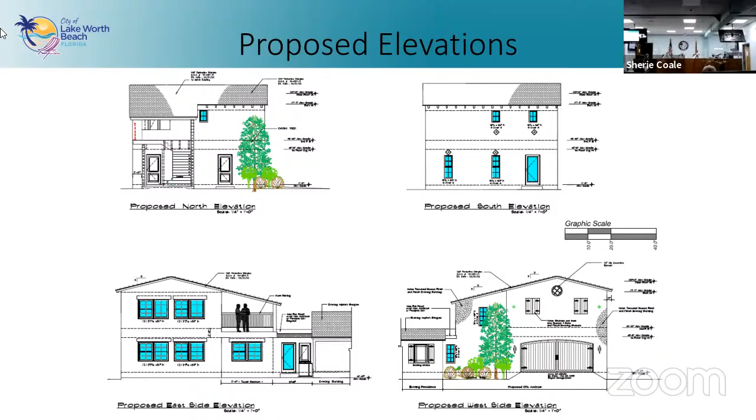Yes, I move to continue. I move to continue HRPB project number 21-001-00222 to a design review the following week, which would be September 15th, is that right? Yes, 15th. And then the formal discussion of the item would come back for your October meeting. Yes. Okay, I hear a motion.

Do I hear a second? Second. Second by Mr. Dorinzo. All in favor, aye. Aye. Opposed, nay. Motion carries unanimously. Thank you, thank you very much. Thank you, okay, thank you. Excellent, good project, thank you guys.

Last project of the evening is 617 North K Street. Good evening, again for the record, I'm Abraham Fogel, Preservation Planner for the City of Lake Worth Beach. I will be presenting item C, which is the consideration of a COA for the construction of a new plus or minus 1,462 square foot single family structure and a plus or minus 650 square foot accessory structure at 617 North K Street.

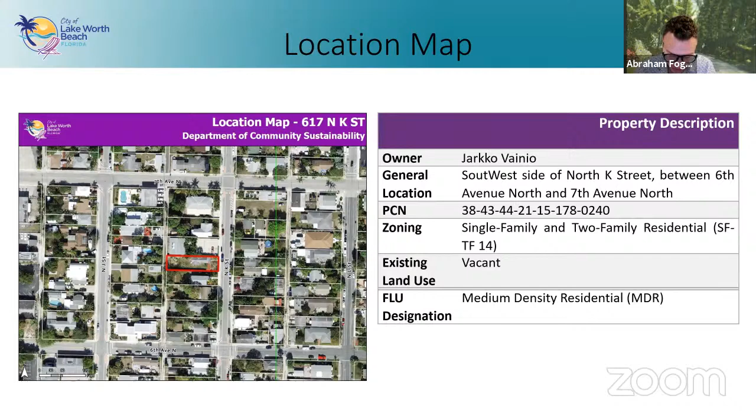The applicant, Pamela Russell, on behalf of the property owner, is requesting approval for the construction of a new single-family structure and accessory structure. The subject property is 37.5 feet by 135 feet, and it contains a lot and a half, platted lot of record, located on the west side of North K Street between 6th Avenue North and 7th Avenue North in Lake Worth Beach. The property is currently vacant and is located in the single-family, two-family zoning district.

A single-story, single-family residence was constructed on this property circa 1925 in a wood frame vernacular architectural style. Although no architectural drawings of the building are available, property cards from the 1940s and 50s describe the structure as being a wood frame construction on a pier foundation, having a gable composition and roll roof, wood windows, and a porch.

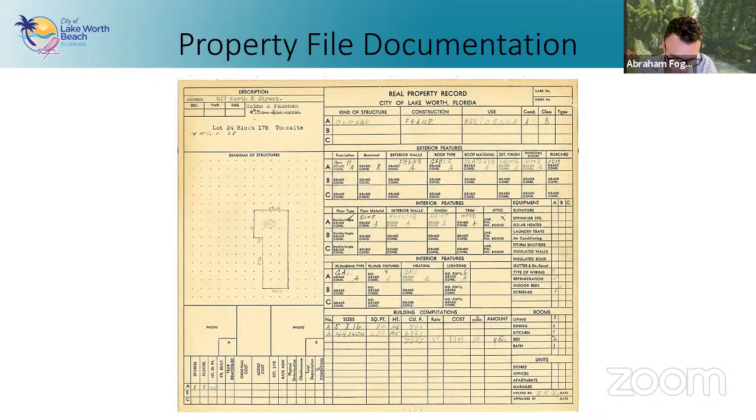And pursuant to LDR section 23.5-4M3, a COA is not required for the demolition of a contributing building that has been condemned by the city. The demolition of the structure was subsequently approved with building permit 21-893.

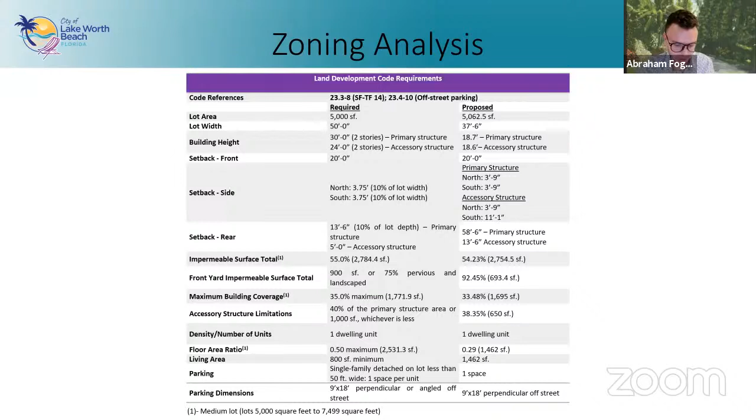A landscape plan was also provided with this application. It will be reviewed at permitting to ensure compliance with the city's landscape requirements.

However, the elevations do show a metal roof with no finish. The applicant can clarify she would like both to be considered tonight. The fenestration incorporates single hung windows with historically compatible window trim, sill, and mullion details.

This request also includes a detached garage with the same detailing and exterior finishes as the new residence. A side-loaded porch is proposed on the east elevation of the structure. Recessed panel garage doors are proposed for the vehicular and boat bay.

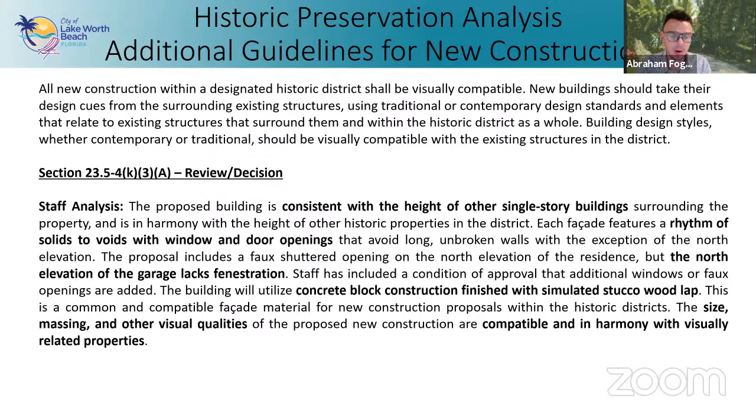Moving on to our design guidelines compliance. This proposal adheres to the design features of wood frame vernacular structures. This architectural style in our design guidelines is described as being built by local craftsmen using locally available materials, and were built to take advantage or to protect from the specific environment in which they were built.

Ultimately, this meant the buildings were utilitarian in nature and had very little ornamentation or detailing other than those elements that had an actual use. It is our analysis that the proposed design utilizes regularized window sizes, appropriate material usage, and has a balanced layout. The structure as designed utilizes elements of wood frame vernacular architecture commonly found in early 20th century residential structures in Lake Worth Beach.

In conclusion, the proposed application is consistent with the city's land development regulations as conditioned, and the structure's design and site plan are generally consistent with the wood frame vernacular architectural style and the historic preservation design guidelines requirements on site considerations. Therefore, staff recommends approval with conditions. That concludes staff's presentation. The applicant is with us tonight.

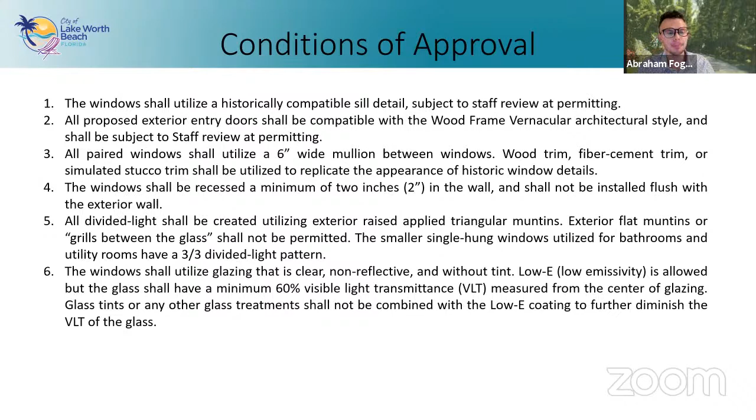Does the applicant have any additional comments to make? Yes, I'm not sure if can you hear me? Yes, we can. Okay, thank you for seeing our project tonight. We appreciate all that you guys do. We feel like this is a great project, and we're excited about building this house in Lake Worth. We've been a part of the community for the past 20 years and are looking forward to making this addition to our home.

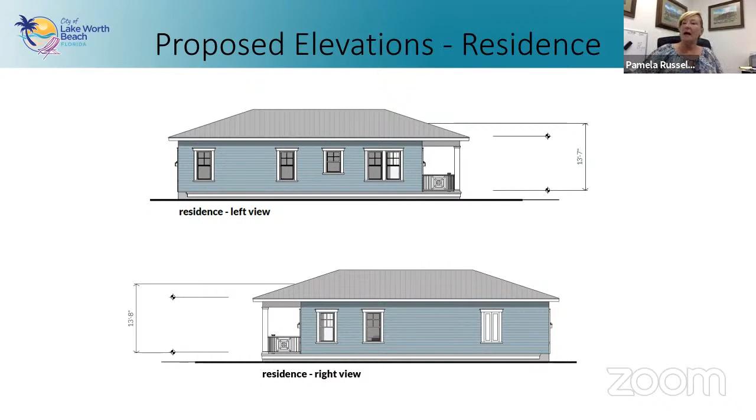I did want to point out one thing. I think Abraham and Jordan have done a great job helping guide us through this process. On the accessory building, on the right side, in the back of the residence, we have the option of a faux window there. The reason we did not put a real window there is because on that side of the house is an apartment building. And because that location of that faux window is the master bedroom, we were trying to mitigate people from being able to look or see down into that bedroom. So that was why we purposefully did not put a window there, but we are open to having a faux window or whatever the recommendations are for that. I just wanted to explain that we were hoping to hide the view of the apartment building with the boat garage, so that might help camouflage that building for us. So that was our thought process on that.

But otherwise, I think the house speaks for itself, and I'm anxious to hear your comments. Thank you very much. Let's go on.

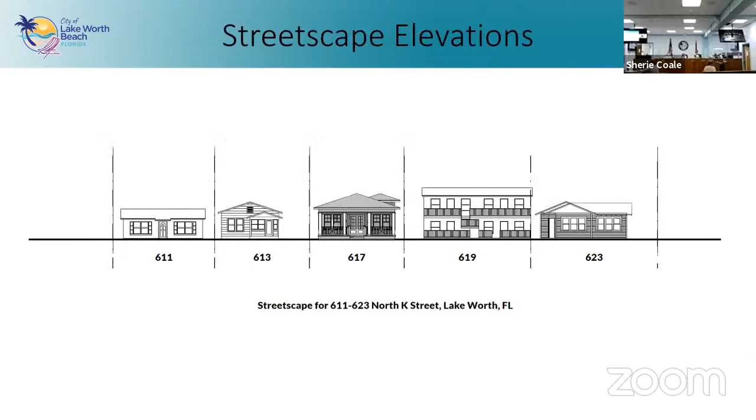We have no comments from the public, I presume. No, sir, we do not. We do not, Mr. Chairman. Okay. Who wants to start? Mr. Dorinza.

I like it. And I think having the boat garage is very interesting and unique. A blank wall in a garage off an alleyway really doesn't bother me, especially if it's next to an apartment building. Putting a faux window there, fine, if the owner's in agreement to that. But I don't think it's something you're actually going to see from the street. Okay.

Judy Fox. No, I like the boat garage. It's cute. Okay, thank you.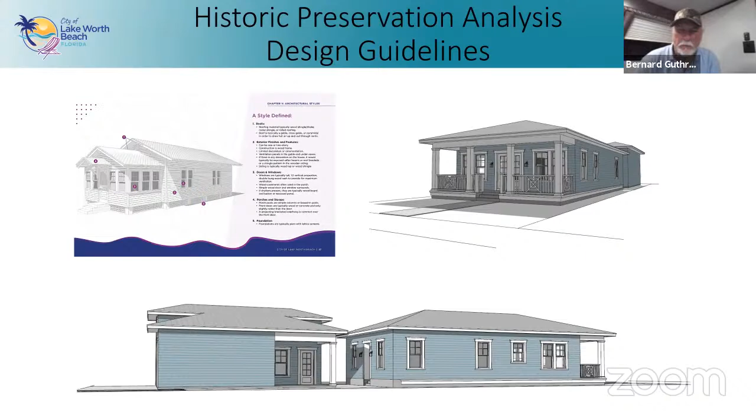Mr. Guthrie. Well, I agree that there needs to be something, fenestration on the side of the boat garage. Now, the applicant, Ms. Russell, did state that they wanted a faux window toward the master bedroom area. I don't have a problem with that, but that is a wide expanse of blank wall on the garage side, even if they used faux windows there for security reasons, so they don't want somebody looking in to see a boat or whatever. But it does appear to be a very large expanse of blank space. And the same thing over on the master, if they want it for security reasons, to make it faux instead of a real working window. I think it could improve the side look of the property. I mean, I'm a boat person.

When I look at a structure that is built for one particular purpose, for one particular family, I tend to look 10, 20 years down the road and see what this is going to be used for with the next family that moves in. So I have a little concern about that, but this is what the owner wants for their property, and they want to put their boat in it. Maybe they'll have another boat after this boat, or maybe they'll switch over to an RV. So, but it's an interesting style. It's a fairly small lot. But that wide expanse is the only concern that I have.

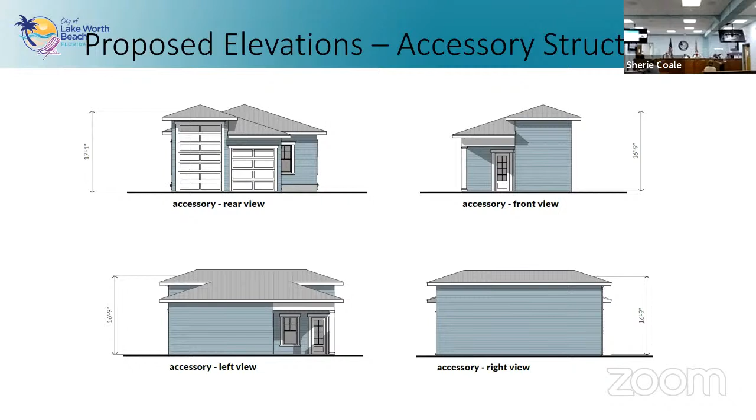Okay, all right, great. Well, what I was going to say is, you might want to really make sure you have the arc of the trailer swing worked out, because this could be a real issue for you. You get it built and then you can't back the trailer in, or even pull it out without doing a bunch of maneuvers, because this is going into an alley, right? So I'm only bringing that up as purely functional, it has nothing to do with approval, but I'm just saying you may want to check that.

The arc of your trailer requires room to make the turn. So, knock out the wall, could you make that tall door a double tall? I know nothing about it. Well, it's not the height, it's the angle, the actual radius to get the boat in and out. So it wouldn't matter if it was wider, it's all about the alley.

Well, and that's a very good comment, and trust me, it's one that my husband has been focused on. He has been looking at that, and the garage is set back from the alley, and I think that's going to give us enough of an angle to get the boat in. It's not that big a boat.

And Jeff, to your point, the code requires that if you have parking on an alley or right of way, you need at least the 10 feet, but you need the full length, you need the 20 feet for the back out. Yeah, no, I understand that, I see the 10 feet for the drive. I'm assuming that's 10 feet, and they actually have 13.5 feet. All I'm saying is that I need to check.

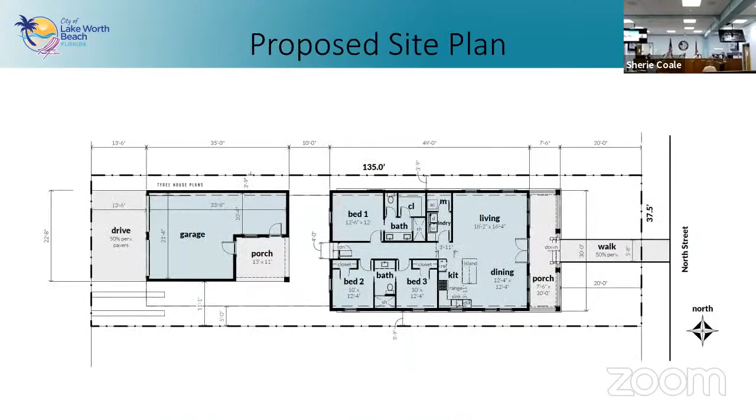Next item is, do you have any interest in exposing the rafter tails? It's just a thought. If you wanted to, I would certainly like it, but that's up to you.

Okay, and this Tyree House Plan Company, will they provide the actual working drawings, or are they finished now? No, we did not want to do construction documents until we knew this was approved. And Tyree will not provide the construction documents, a local company will do that. Okay, the reason I ask is the detailing they're showing, the window trim and so on, is excellent. I love it, very well done.

And I just hope we don't lose that when we get into working drawings. Well, this is what's approved. Yeah, so this is what's approved, we will expect the final thing to have the same detailing. And also a little thing, if I'm reading it right, the window leaves appear to be a different color from the trim, which I think is a wonderful idea. We've talked about it before. So if you decided to do that, I would certainly approve.

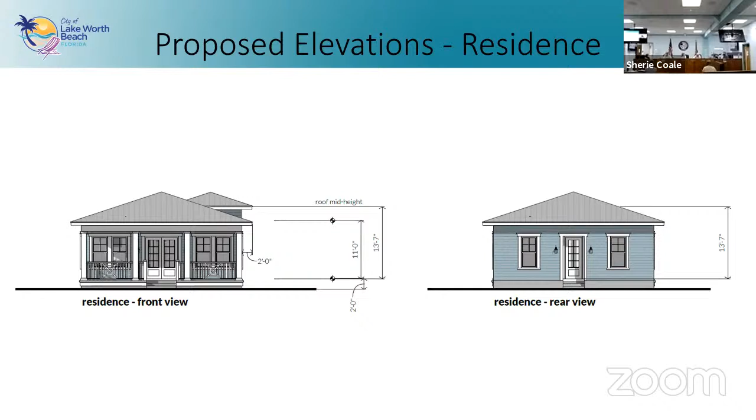That's the end of my comments. Mr. Chairman, can I ask one thing real quickly?

In the presentation from staff, they said that we would be discussing the difference between a metal roof that's depicted and a shingle roof. Can I get the owner's take on that, please?

We actually were thinking of asphalt shingles. To be honest with you, I think the metal look on this was just a miscommunication. But we were thinking asphalt shingles, although we are open. If you prefer the metal, then that's fine too. But we were thinking of asphalt.

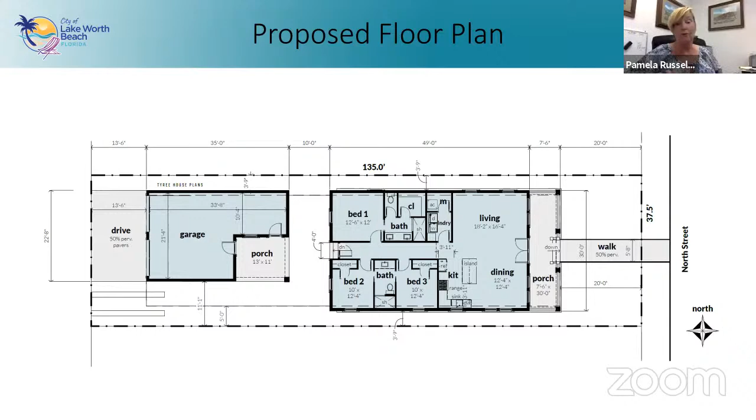Okay, I think probably the board was thinking about asphalt too. Okay, we're totally good with that. Do we need to go through the conditions of approval, or are you okay with them?

Ms. Russell, number 13 is still that staff recommendation. That's not a condition, it's just a recommendation, so you can either strike it or leave it. We won't enforce that, it's just a recommendation.

Okay, and the rear driveway will be extended 10 feet. Where are you? They're at 13. Yes, I think you were talking about the strip driveway needs to be a little bit longer. Oh, well, it states it right there.

And just to go back, Mr. Chairman, when you talked a little bit about the mechanical equipment and the setback, that's for new construction - mechanical equipment cannot be located in the setback. So when you're doing your construction drawings, you're going to need to locate your mechanical equipment on the side with a larger setback, because your required setback is 3.75 feet from the property line. So your mechanical equipment cannot be in that setback.

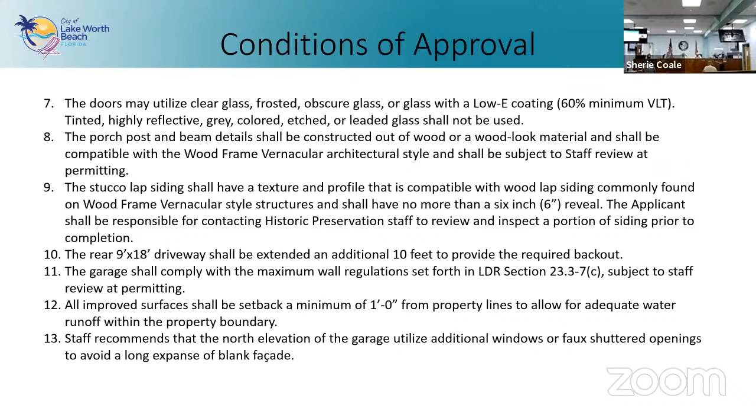Okay, thank you very much. All right, are we at the point of a motion?

I move to approve HRPB project number 21-001-00182, staff recommended conditions, for a certificate of appropriateness for a new construction of a plus 1462 square foot single family structure and a plus 650 square foot accessory structure at 617 North K Street, based upon competent substantial evidence in the staff report and pursuant to the City of Lake Worth Beach land development regulations and historic preservation requirements.

Second by whom? By Mr. Pickett. Motion made and seconded by Mr. Pickett. All in favor, aye. Aye. All opposed, nay. Motion carries unanimously. Thank you. Thank you very much.

Wonderful. Folks, we're into planning issues, public comments, which I see none, and department reports. We have no department reports. Okay, you'll get your packet next one.

Wow, wonderful. So you're going home to do it now. Just checking, George - we actually didn't want to send it to you tonight, just in case.

Overwhelming, yeah. I have a quick board member comment that I'd like to make. And that goes back not specifically to a project we saw tonight, but we're getting a lot of pool cabanas.